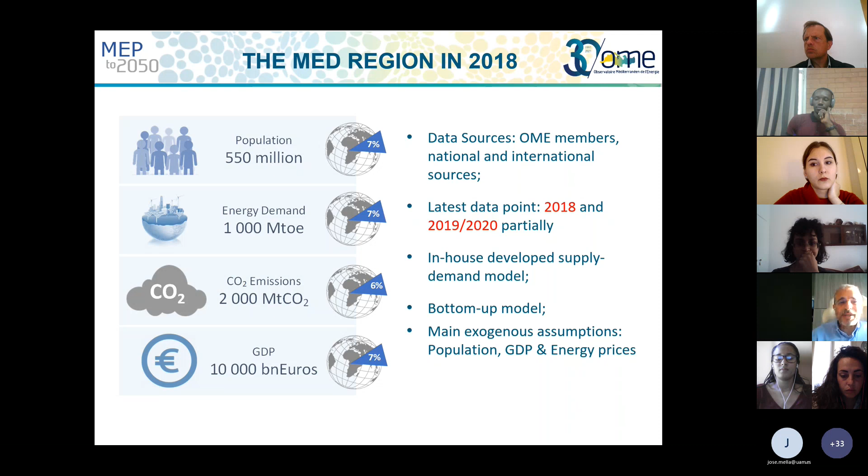So the main determinants of the forecast equations are population, economic growth or per capita income, and energy prices. For the Mediterranean region, especially South Mediterranean countries, energy prices are not very significant in the equations, partly because in many countries energy prices are subsidized by the government. This subsidy makes demand insensitive to prices, so it doesn't adjust according to price changes.

Now, COVID had a large impact in the Mediterranean region. It represented a 9% slowdown in the economy. Interestingly, most of the largest impact was in the North, because of the industrial situation, as you can estimate.

Now let's look at the main assumptions I mentioned: population and economic growth into the future, because they will be important factors determining energy consumption in the region. So between 2020 and 2050, in other words in the next 30 years, 128 million more people will be living in the Mediterranean region.

But in fact, all of this growth will come from South Mediterranean countries. In the North Mediterranean, in contrast, the population will decrease by 13 million. So all the demographic growth in the Mediterranean region to 2050 will emanate from the South Mediterranean region.

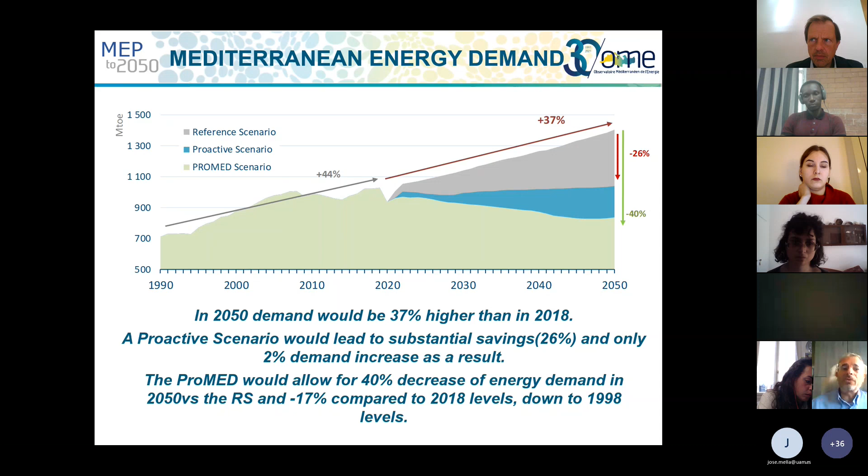Will that be easy? Of course it will not be easy, but I will show you later on what kind of benefits it would bring.

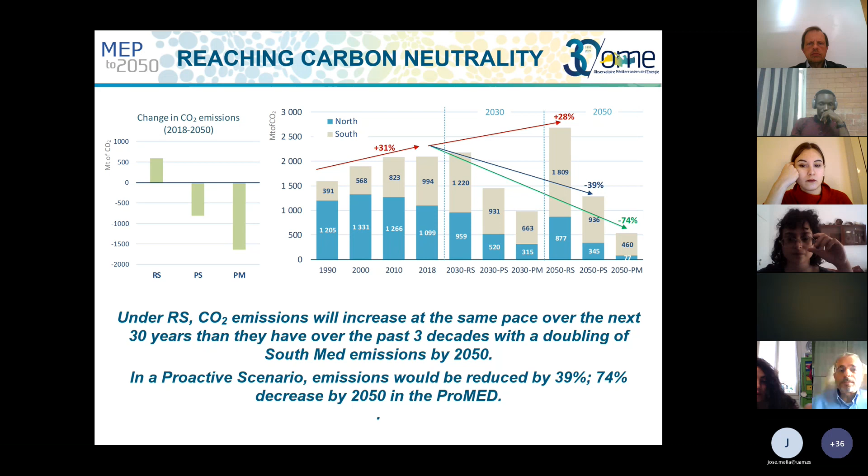In the business as usual scenario, we calculate that CO2 emissions could increase 28% between 2020 or 2019 - it differs, for some countries we have base year 2019, sometimes 2020. So it may increase 28%. When we look at the other scenarios, the proactive scenario shows that CO2 emissions could decline 39%, and in the ProMED scenario, that means net zero, CO2 emissions could decline almost 74%. This is a big lesson to keep in mind.

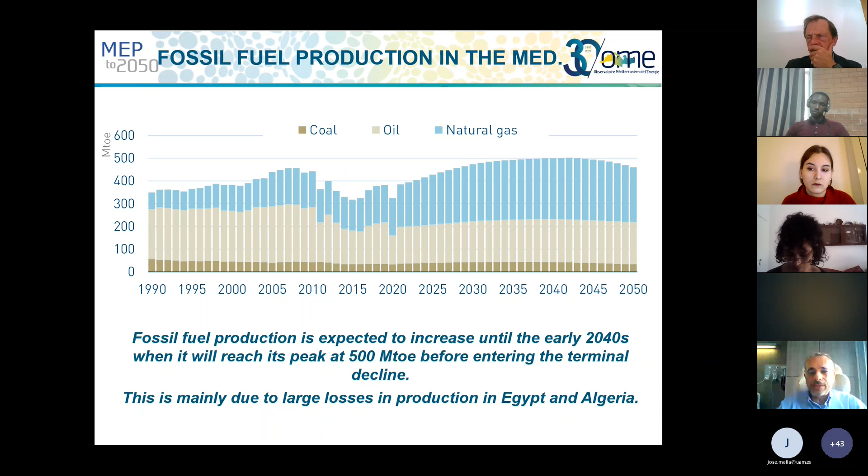Now, I mentioned gas production will peak around 2042. Why 2042? We estimate country by country production, then sum it all, and it showed 2042, followed by a sharp decline. This sharp decline is especially because of Egypt, since many fields are in deep offshore Mediterranean, and decline rates in deep offshore fields are very high.

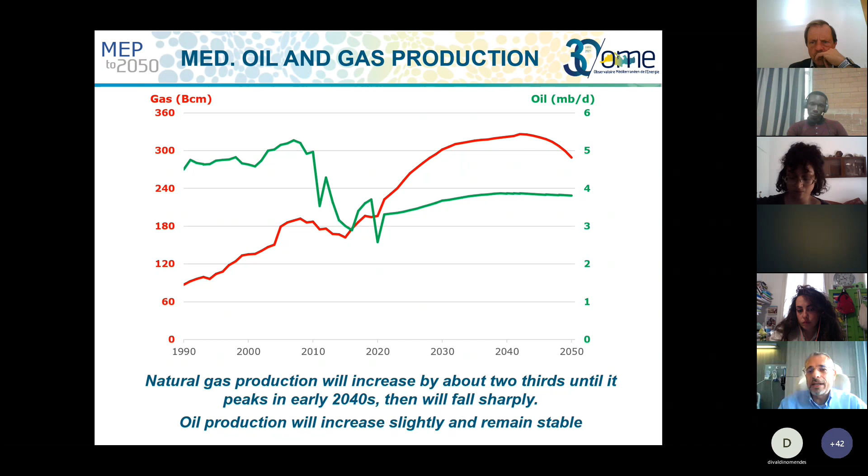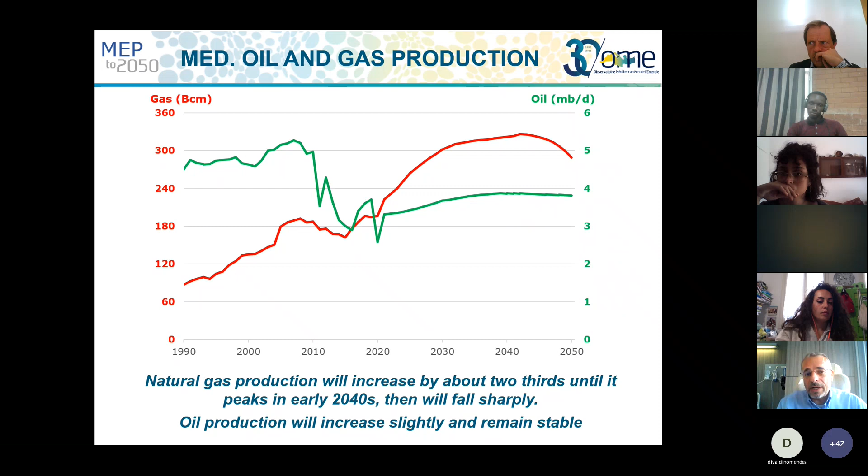Whereas in oil, we will have a slight increase and then stability. In fact, oil production will decline basically everywhere in the Mediterranean except for Libya. The slight increase you see is because of Libya, since we assume the security and political situation there will change in the midterm, and Libya will become a large oil producer again, as it was before.

So just a summary for fossil fuels, with a focus on oil and gas: fossil fuel production will decrease after the early 2040s, but demand will also, depending on the country, decline sharply as we approach 2050. What does that mean?

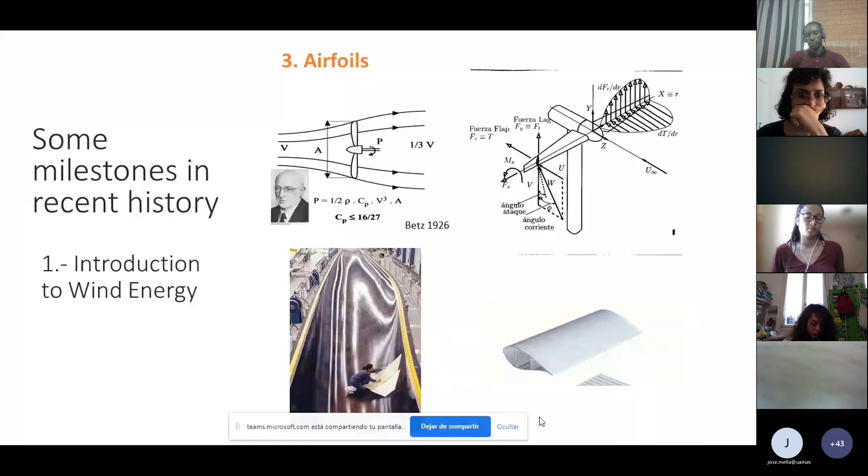Following this introduction, if we talk about the typical applications of wind generation, we should start with the grid-connected application, which nowadays is related to distributed generation. Historically, as we have seen, it was the last one to come, but nowadays it's the most common.

Nearly everywhere in the world, it's not difficult to find large-scale wind farms. They are called wind farms when installed onshore on the ground. In the past, there were only these wind farms, but nowadays we also have wind farms on the sea, usually called offshore wind farms.

The application in the sea, offshore wind farms, looks much more challenging from a technical point of view, but also brings some advantages compared to onshore wind farms. For example, the wind resource may be much higher and more stable - there are no obstacles, no mountains, no orography. But of course there are some challenges, such as working in as harsh an environment as the sea, and in some places the depth of the sea is quite large. So these applications have started in places like the North Sea in Europe, where the sea depth is not that high.

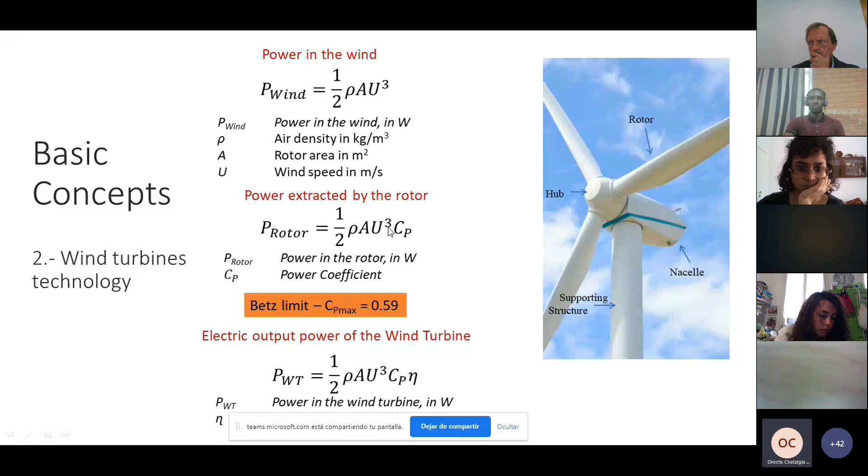So with these three equations, we can see how from the power in the wind, we get the power output from our wind turbine.

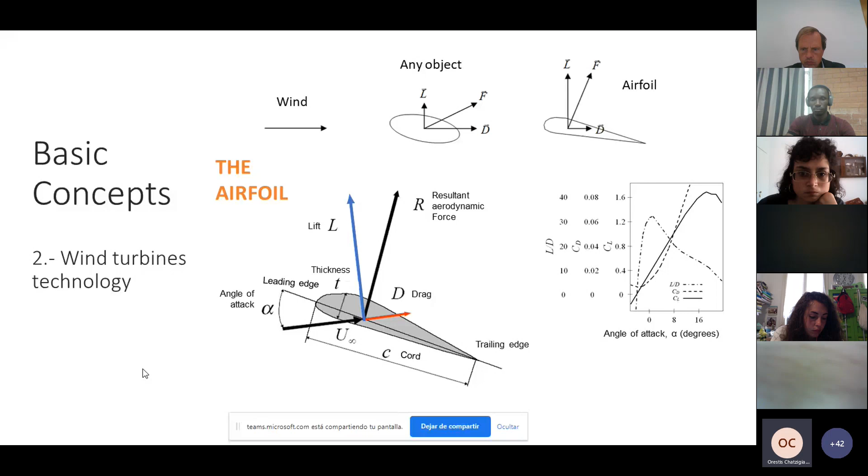And this angle is important because it's an angle we can use to regulate our production. In general, of course, this angle of attack will be chosen in order to maximize our production.

As you can see on the graph on the right, there is a maximum for the relation between lift and drag, which in this case is nearly at zero angle of attack, 0 degrees. Really, it's not zero, it's some degrees, but close to zero, maybe 3-4 degrees. So usually the blades are fixed at that angle in order to maximize production.

But we can also use this angle of attack by varying it. When we want to regulate the production, we can move the blade, diminishing the efficiency of the energy extraction in the rotor. This is used very commonly nowadays in most wind turbines, as we will see now.

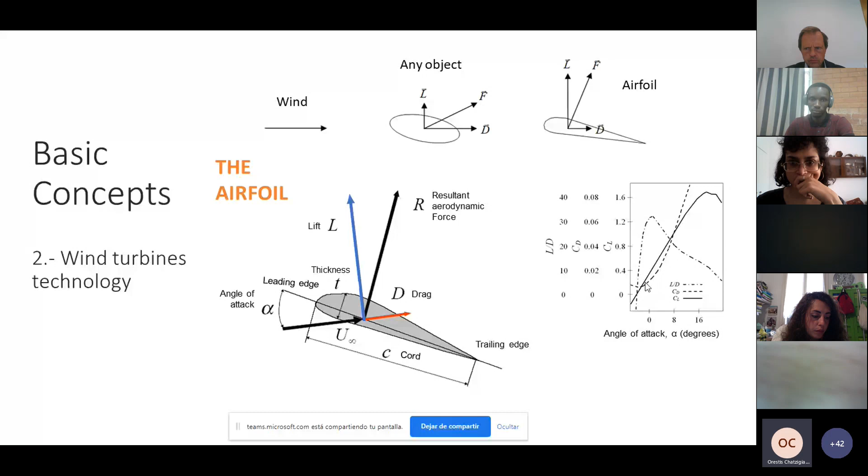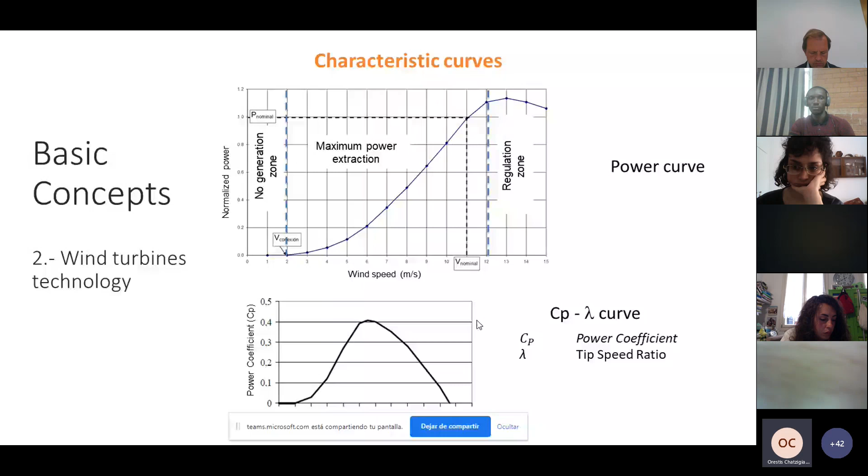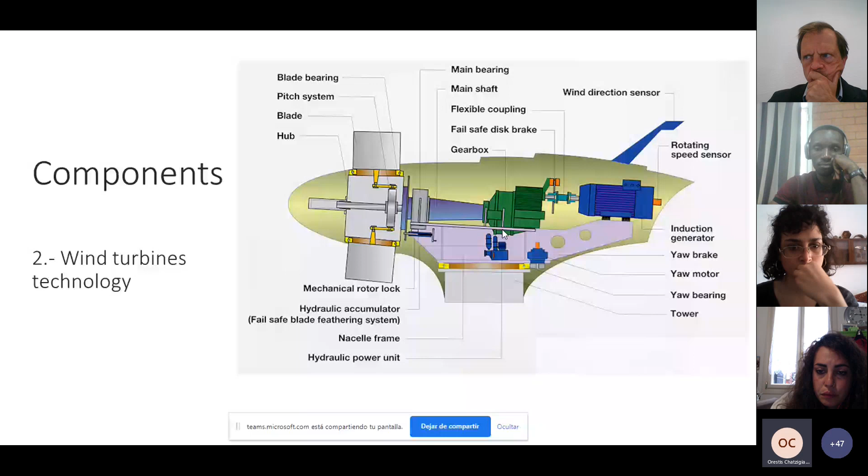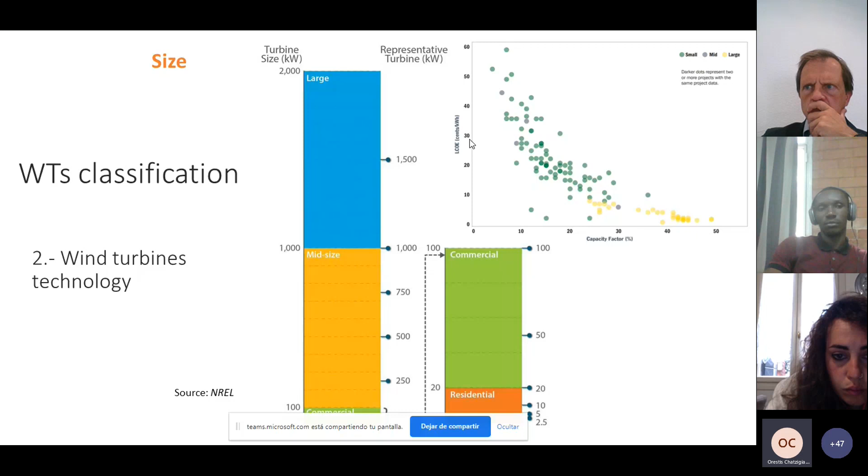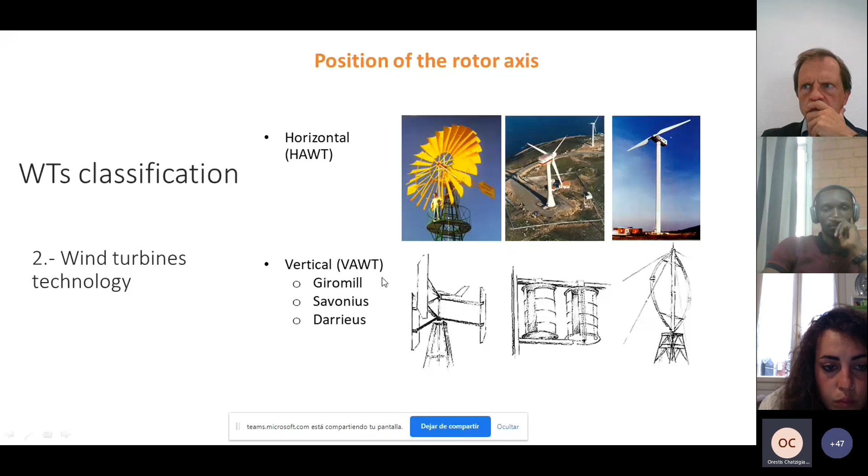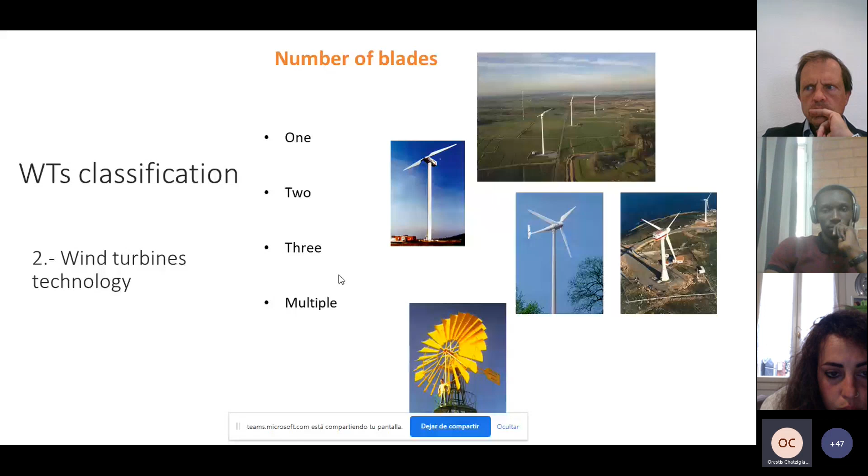The number of blades, the most typical number is three. For all large scale it's three, and for small scale it's also the most typical, but we can find other numbers from one up to five or six, and the multiple blade American windmill we saw before.

According to the tip speed ratio, the tip speed ratio is a dimensionless parameter which is a relationship between the linear speed at the tip of the blade and the wind speed. It defines if a wind turbine is fast or slow.

Don't get tricked by the words fast and slow, because if we see large scale wind turbines nowadays, they rotate at a very low rotational speed, but they are not slow. They are quite fast because even though the rotational speed is low, the radius of the blade is quite large. So the multiplication of a low rotational speed by a high radius produces a high tip speed ratio.

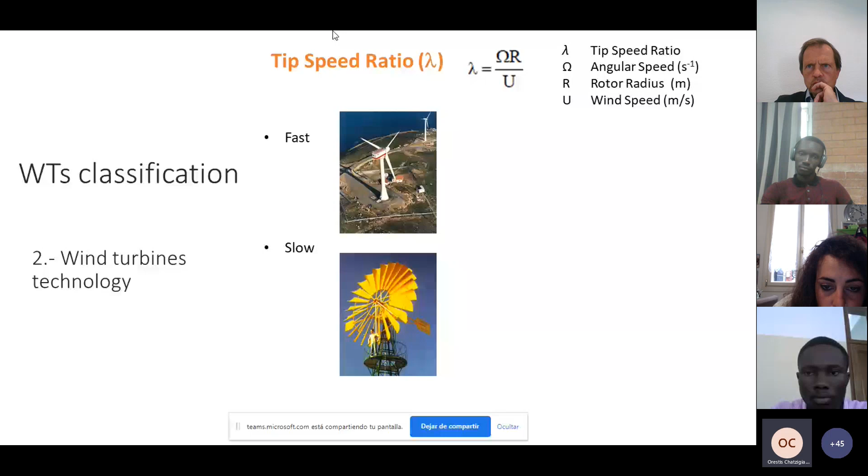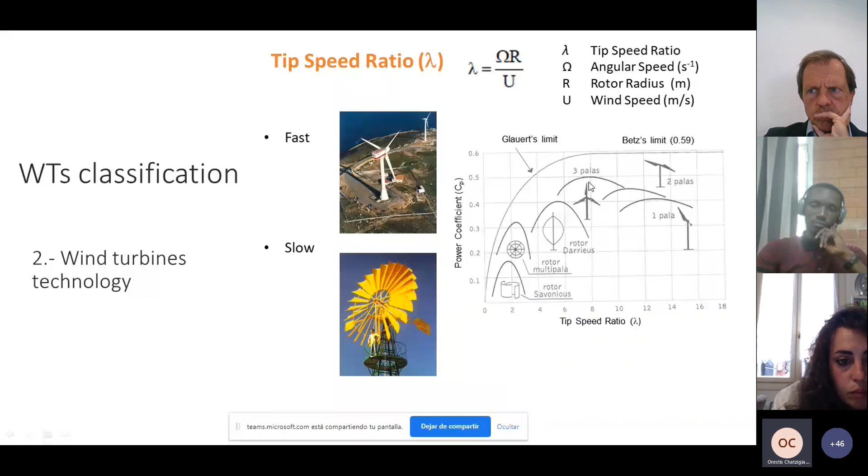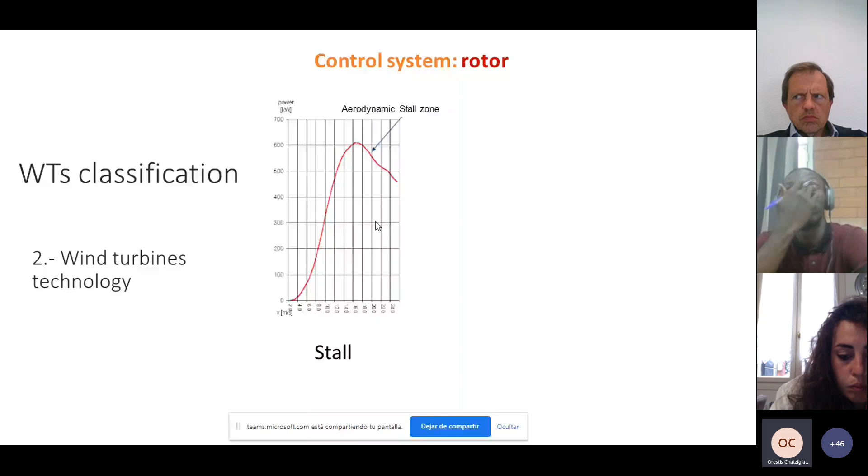According to the control, we could find, although they are not very common nowadays, stall regulation rotors. Stall regulation is a passive aerodynamic regulation, just due to the functioning of the rotor and the blades. When the specified wind speed is reached, the turbulence increases and the efficiency of the rotor decreases, producing a natural passive regulation in the rotor. The advantage of this regulation is that it's very simple, but the problem is that it's difficult to regulate and control.

Nowadays, all large wind turbines use active regulation in the regulation zone, and they regulate by changing the pitch with a pitch control. They vary the angle of attack, as we saw before. By varying the angle of attack, the control can maintain a constant output production.

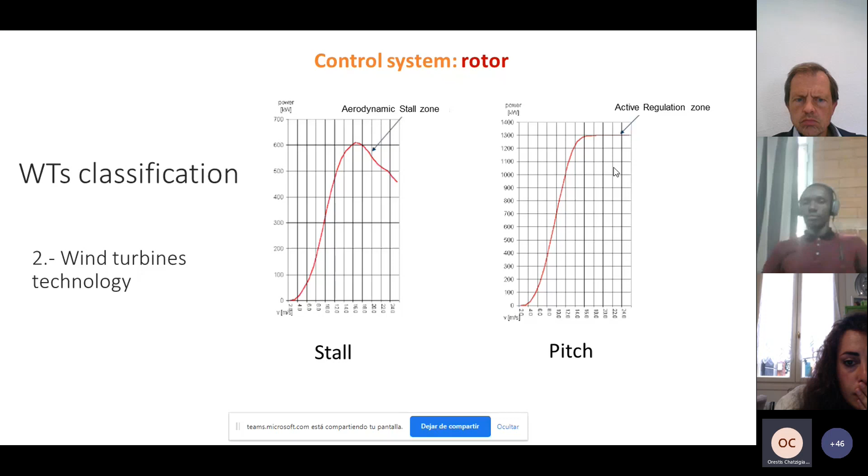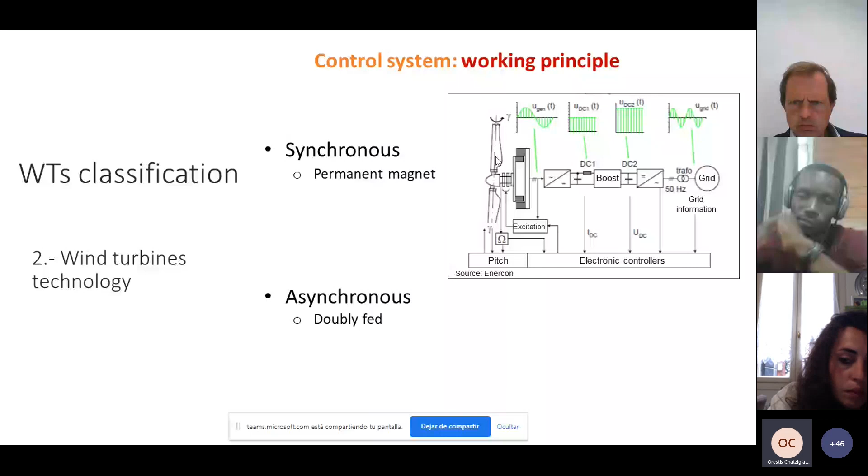The last classification I will mention is the one that appears in the IEC standard, which defines classes for wind turbines. The same model of wind turbine may have different classes according to the site. This is an interesting classification because it's site dependent — it depends on where the wind turbine is going to be installed, mainly according to the wind resource and also the turbulence intensity of the site.

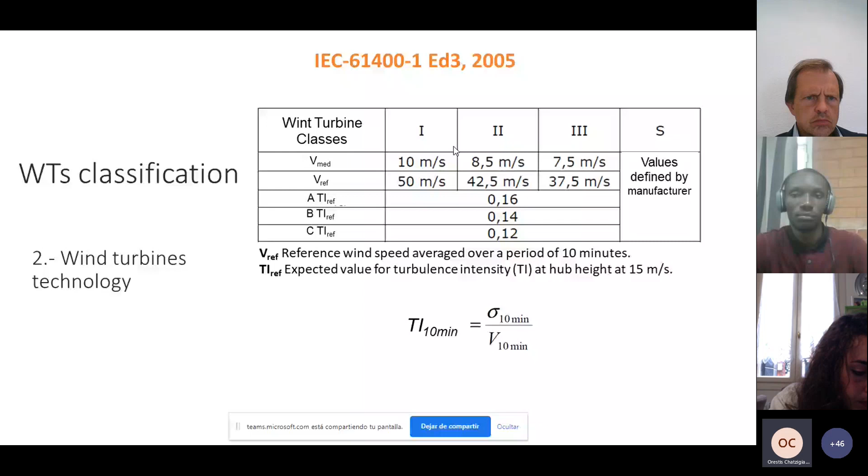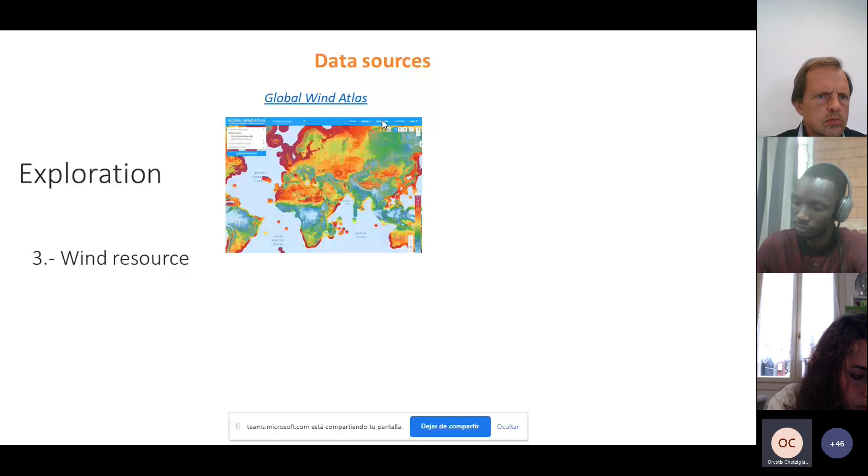Now we will move to the wind resource block, and here are some aspects we will address, starting from the sources to look for data. These sources are mainly useful for academic studies or for small wind turbines, because large wind turbines usually don't rely so much on external sources — they have their own measuring campaigns. Here I'm sharing two global data sources that can be used everywhere.

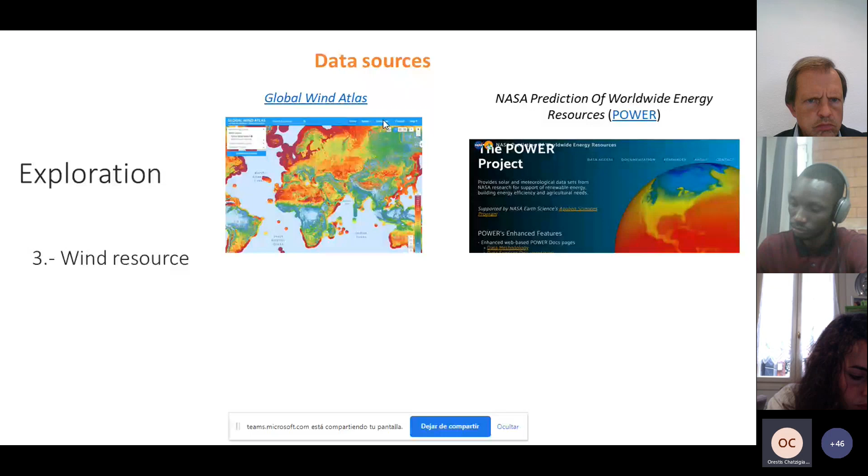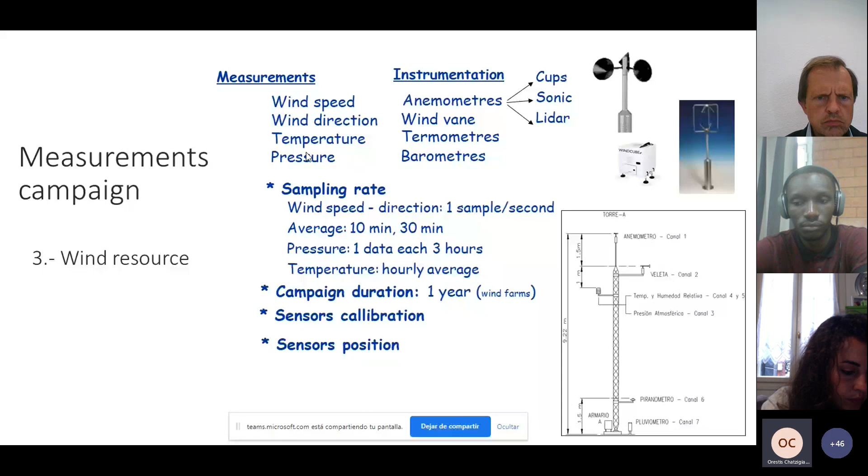Once we have the measurements, or perhaps we could say, what's the information we need? Of course, we need the average wind speed. We can have the hourly average through 1 day, the hourly average through 1 month, month by month on a monthly basis, and the average wind speed on a yearly basis.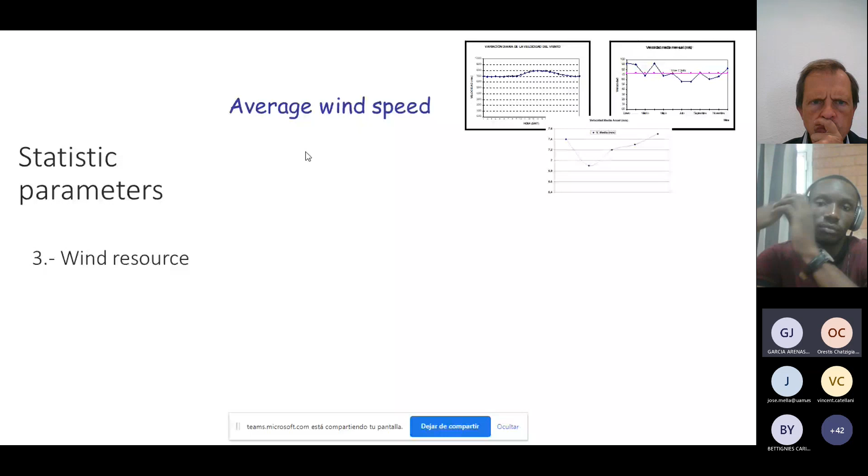The wind rose, it depends. It's critical if we are going to make an obstacle study. If we are not, then we don't need the wind rose. If we just want to calculate only the energy production, the average wind speed is enough. But if we want to take into account the effect of the obstacles, then we will need the wind rose.

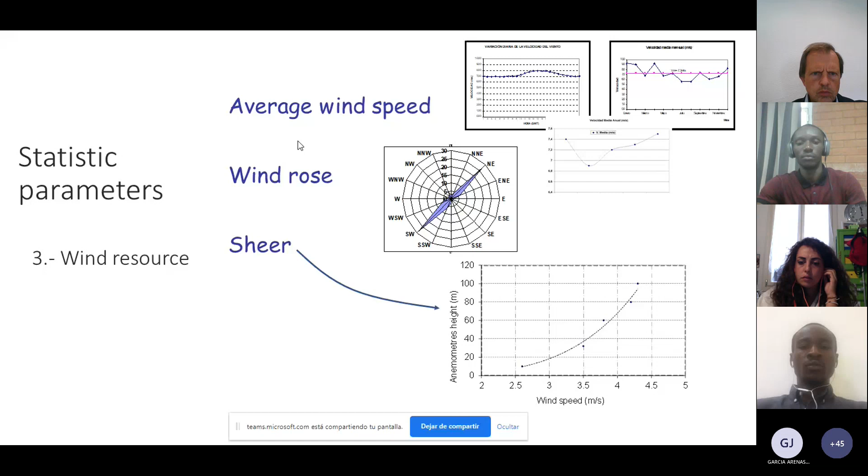The wind shear is the variation of the wind speed with the height, not to confuse with the variations of wind speed of the energy production with the altitude, which, as you remember, was in the previous equation at the air density. Here, the shear is for a particular site with a fixed altitude. Depending on how much we move from the ground, the wind speed will increase because the ground is like a brake for the wind. And remember the effect of the altitude also. So we have different options.

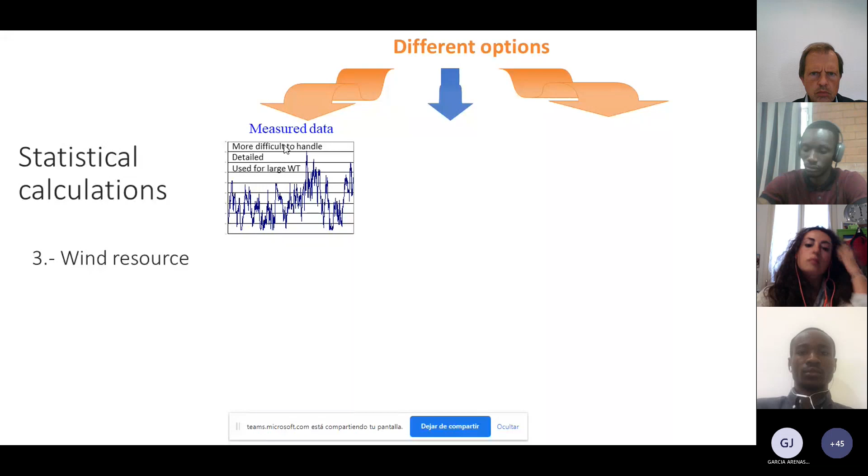We don't have much time, so I will go a bit quicker on this part. This is more for the calculations, depending on the type of data we have. If we have measured data, then the calculation of the energy is as simple as using, for each hour, the wind speed for that hour and entering it into a power curve to see how much energy I'm getting that hour, then making a summation for the whole year. But as I said, it's not always the situation, and maybe we don't have this measured data.

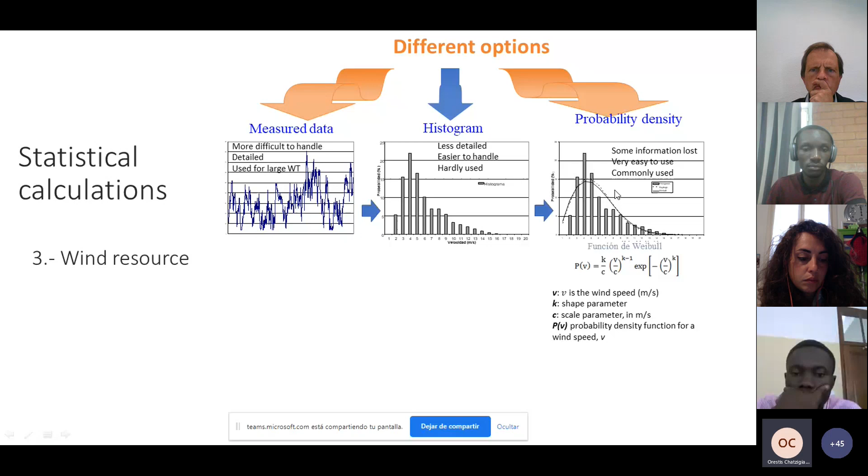And maybe what we have is the probability density distribution description. This probability density for the wind resource characterization, the one that fits better is the Weibull distribution, the Weibull function, which is this one. You can see that it is defined by only 2 parameters, the shape and the scale parameters. So the great advantage of using the probability density function description is that with only 2 parameters, the shape and the scale parameters, we have an estimation of the wind resource on a particular site.

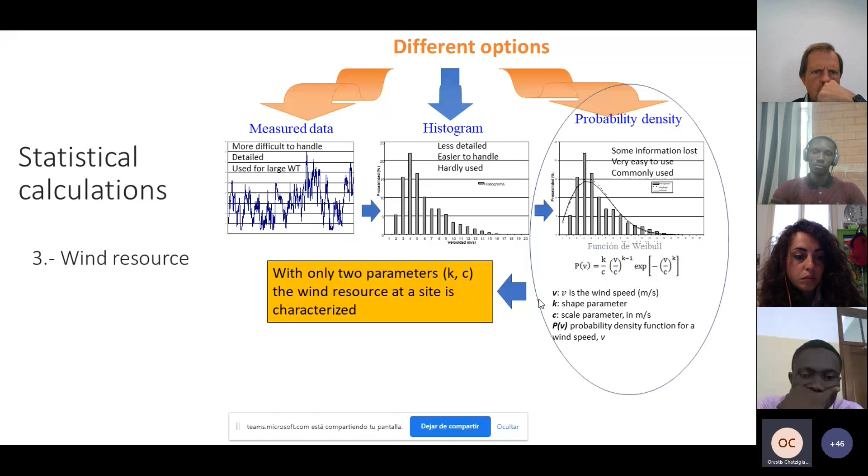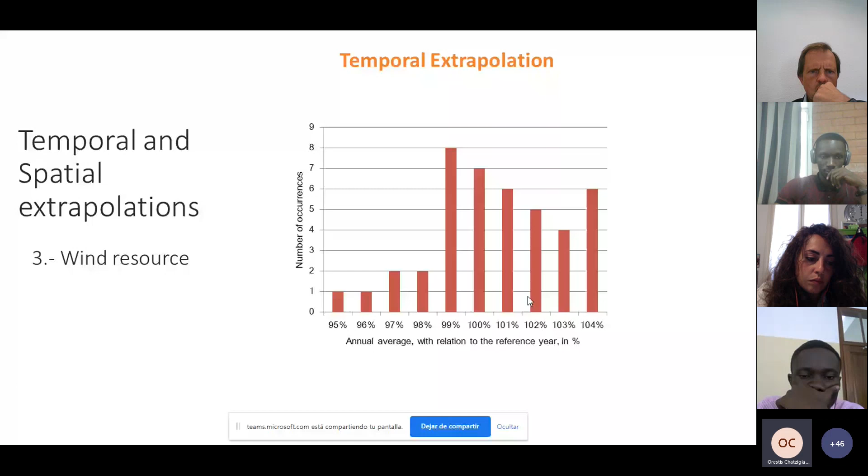This is particularly practical, for example, in global wind maps, because of course, in a global wind map, we cannot work with measured data directly. So maybe we will need to perform a temporal extrapolation just to know if the year we are using as a reference is representative of the wind resource in that site, and spatial extrapolation. Here is described the model used in WAsP.

WAsP is a very commonly used tool to evaluate the wind resource for wind farm planning. And this model proposes to eliminate the influence of the site in which the wind speed has been measured, eliminating the influence of the orography, the roughness, and the obstacles, obtaining what is called geostrophic wind, which is the theoretical wind at the upper part of the atmosphere, and this wind is supposed to be the same everywhere, within a particular region.

And once we know the geostrophic wind, we can particularize this geostrophic wind, which is common to each one of these pixels. We can calculate what the wind would be at each one of the pixels, including for each pixel the influence of the orography, the roughness, and the obstacles for that particular pixel. This is how, with only one measuring point, we get the wind estimation for a whole area, extrapolating spatially.

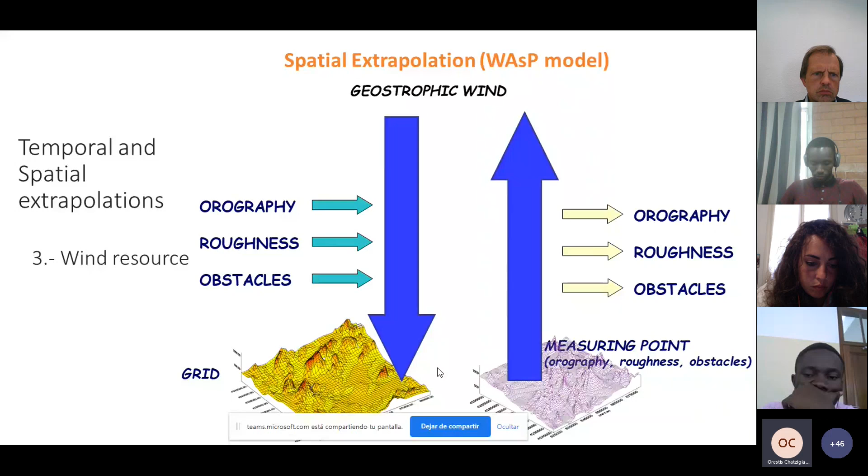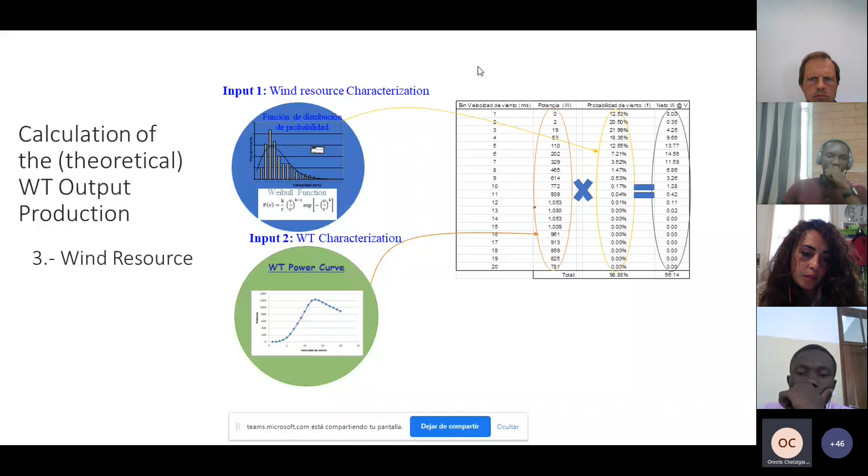This is really a numerical integration, which is done bin by bin. Each bin is the interval we are dividing the wind speed range into, in this case from 1 to 20 meters per second. We make a multiplication bin by bin, and then we make a summation of all the results. And this number we obtain down here represents the average power that this wind turbine produces in this particular site.

So the average power is a result itself, but it's not a result that is commonly used. The most commonly used result is the annual energy output, which is the total energy that the wind turbine produces in this site, and is calculated by multiplying the average power, which has been calculated here, by the number of hours per year.

Another common parameter is the equivalent hours, which is calculated by dividing the annual energy output into the nominal power of the wind turbine. It's equivalent to the number of hours that this wind turbine would be working at nominal power to produce the same energy. And finally, the capacity factor, which is a relationship between the average power and the nominal power of the wind turbine.

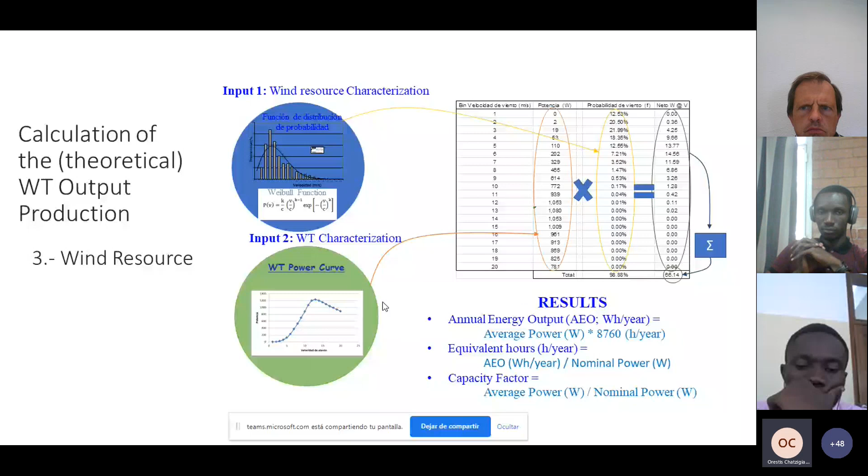This is just to show how to calculate it. Usually we use either a self-made Excel sheet, for example, or some of the existing tools that are available for this calculation.

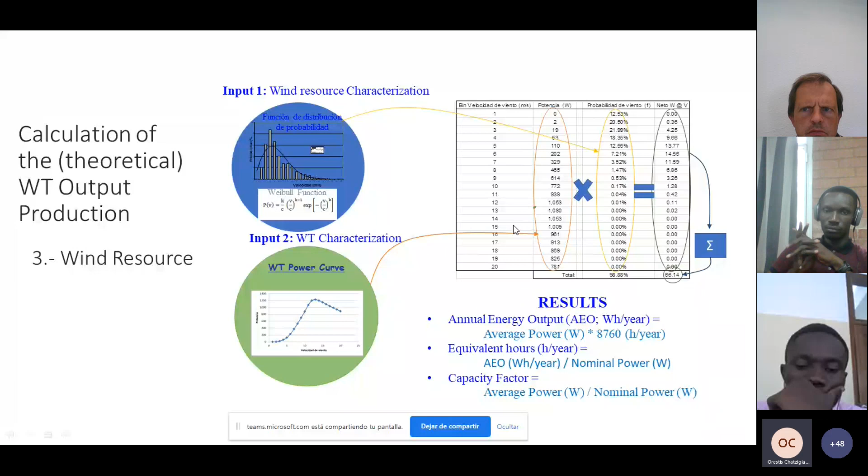Okay, so we enter into the last block with not much time, but I will try to cover it all briefly. We will start with the economy.

In this graph, we can see how with the deployment of the wind turbine during these years, the generating cost of wind generation, talking about large scale, has decreased according to the increase in installed wind power. This is what is usually called economy of scale, and this is supposed to have a limit, but it's expected that the limit is even lower for the generating cost, so there's still some range to vary.

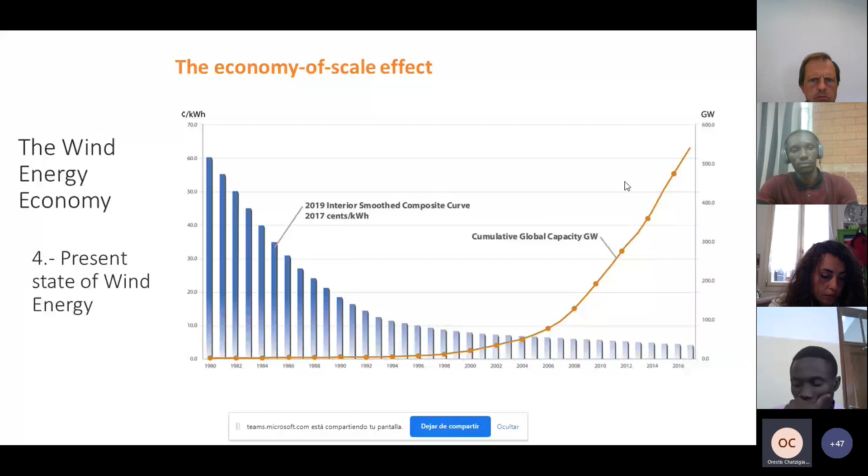Nowadays, which are the most common remuneration modalities? How are the wind farms that are being installed nowadays paid? These are the main modalities. Maybe they are not all, but they are the most important ones.

The auctions are very common here in Europe, or also in America. Power purchase agreements are more common in America, but here in Europe they are starting to increase their presence too. Feed-in tariffs have been very common here in Europe and in America, but nowadays they are most common in China. Tradable green certificates and tax incentives are economical incentives to investment in renewable energies in general.

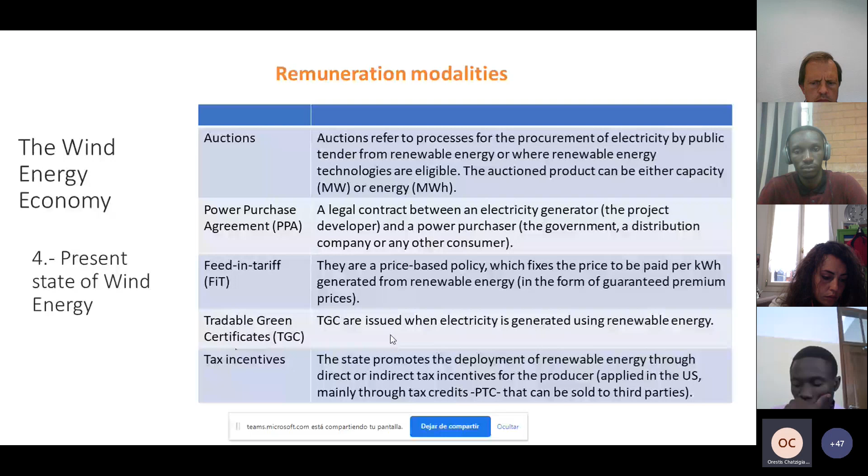During the last year, 2020, in this graph we can see the percentage of each modality on onshore applications, meaning on the ground. We can see how the feed-in tariff is the most common modality in China, as China is the main market and has been the main market during this year. That's why it has such a strong presence.

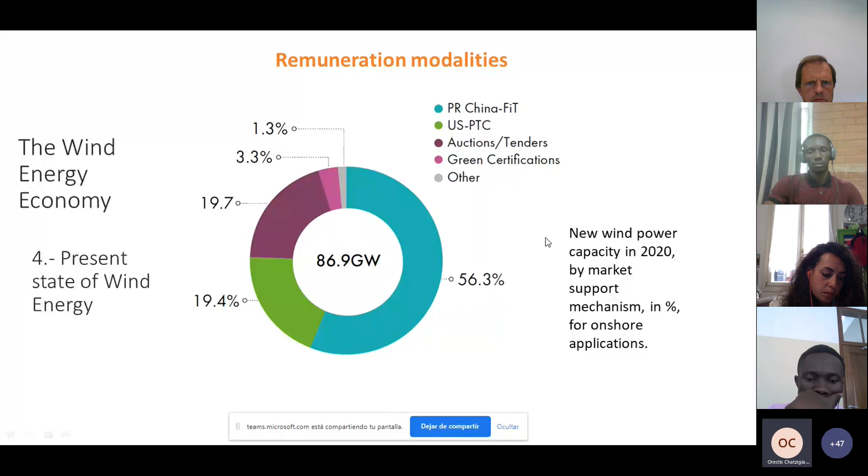The US is mainly using tax credits, and auctions are being used mainly in Europe and South America. The PPAs are not well defined - maybe they fall into 'other' - but as I said, their use is becoming more and more popular during these months.

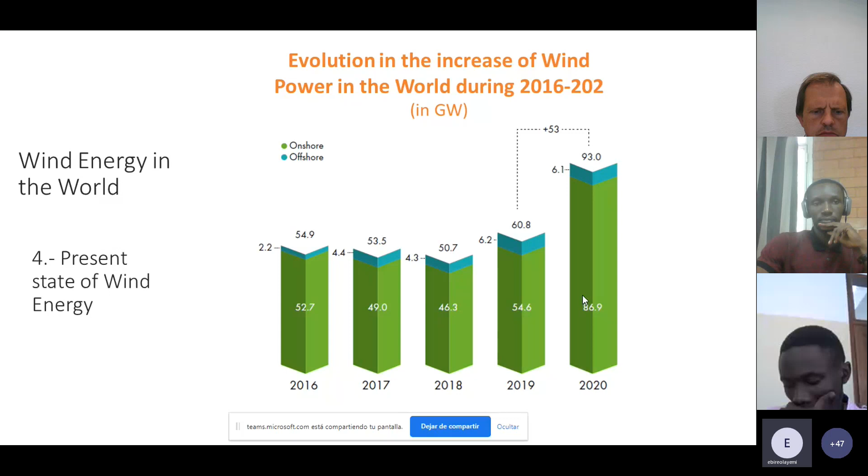This is the evolution and increase of wind power during the last few years. We can see it was more or less stable, but during the last year it has increased quite a lot, more than 50%. So the trend is that this increase in installed power will be maintained for future years in order to meet all the scenarios described in the previous session.

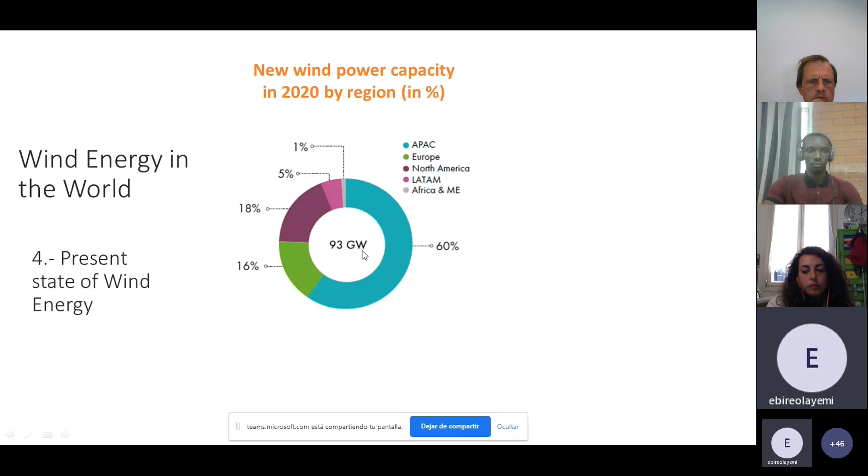This is the new wind power capacity in 2020. Most of the new installed wind power capacity has been installed in the Asia Pacific region, followed by Europe, North America, and Latin America. For Africa and Middle East, we find 1%. Of course, 1% of 93 gigawatts is nearly 1 gigawatt, which is not so bad.

And these are the main markets. China is the first one, followed by the US. This has been during the last year, 2020.

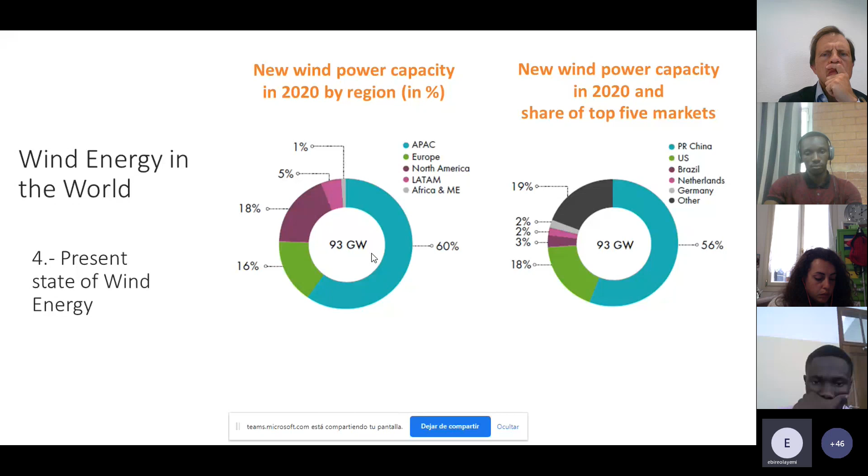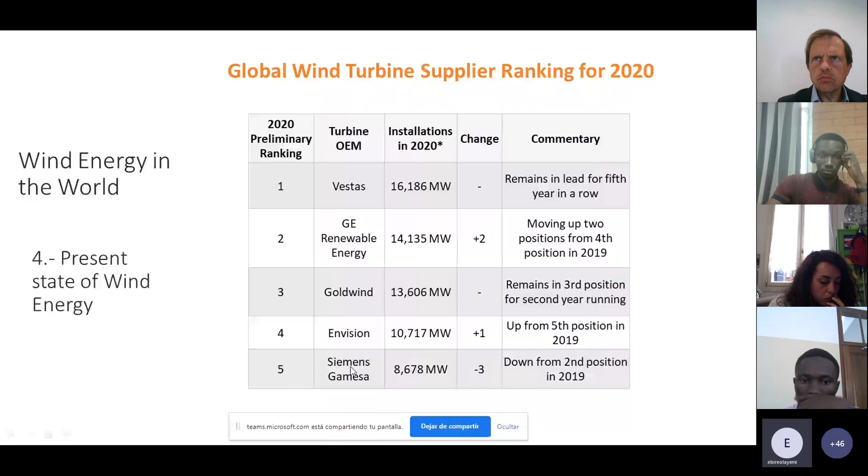Mentioning some of the main manufacturers in the world: the main manufacturer is the Danish Vestas, then GE Renewable Energy from the US, Goldwind, Chinese, Envision, also Chinese or half Chinese, and Siemens Gamesa. Gamesa was a Spanish manufacturer, but now they merged with Siemens, so we could say they are German and Spanish, maybe more German than Spanish nowadays.

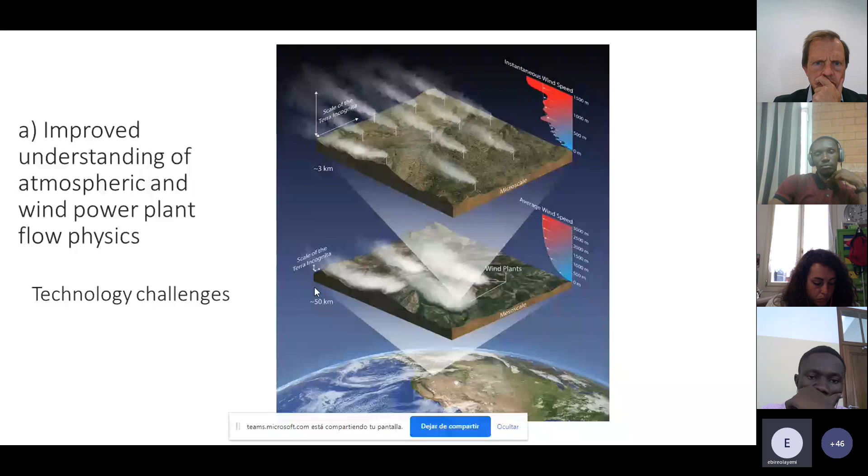Finally, the last point, the technology challenges, which I will mention very briefly. As the size of the wind turbines is increasing so much, and also the size of the wind farms, both onshore and offshore, the influence between wind turbines and between wind farms is bringing new challenges that were not seen before because of this very large size.

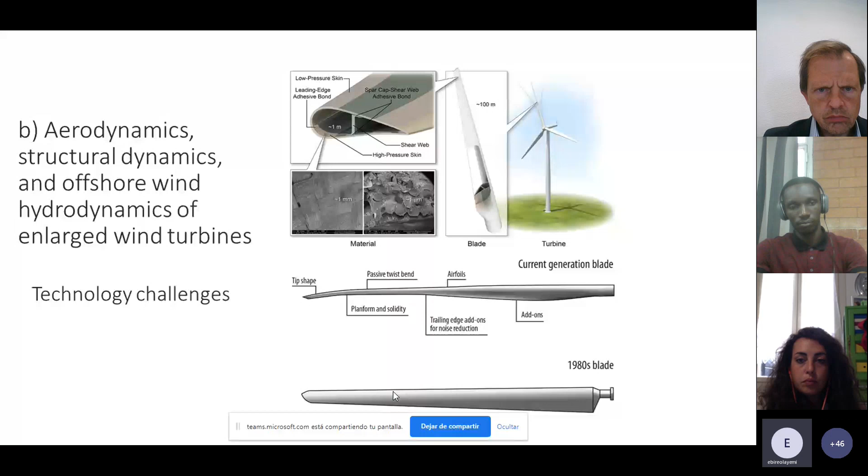We have to think that the wind turbines being proposed nowadays use blades, each one larger or around 100 meters, which is a very, very large blade. So there is a challenge in materials, in efficiency, in loads on the blades. You can see a comparison between a blade from the 1980s and the current generation blade, which are much more thin, but of course much more complex also.

And finally, the challenges that this very large integration in the electrical grid brings. This is not only for wind generation, but also for all renewables. But of course, it influences wind generation as well.

Thank you very much for your attention, and sorry because I think I took more time than expected, but I hope we have some time for discussion.

Thank you very much for your interesting intervention. Not only interesting, but you were able to explain difficult things in a relatively easy and clear way. So the time is over, of course, but we have room for a short question. Go ahead, please.